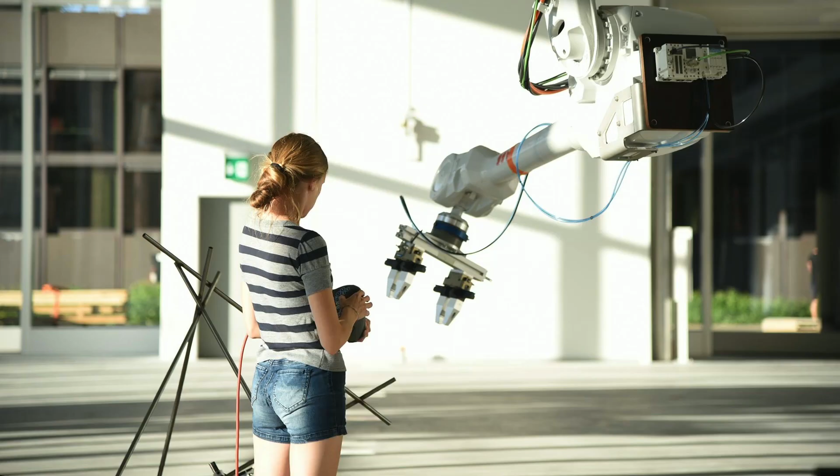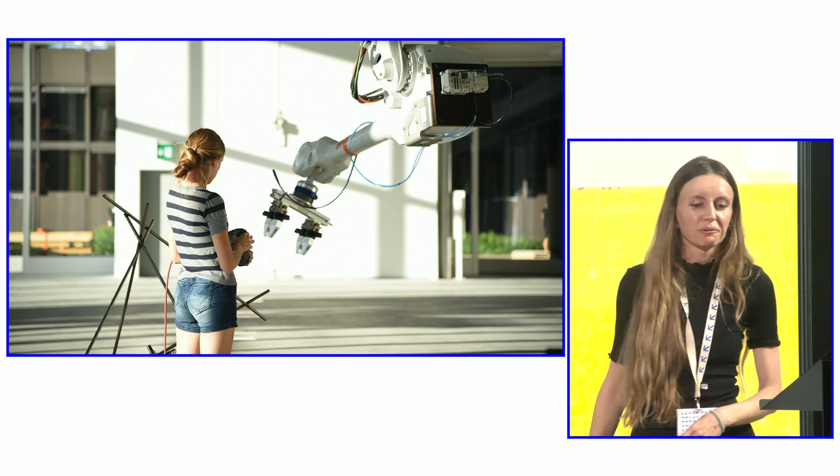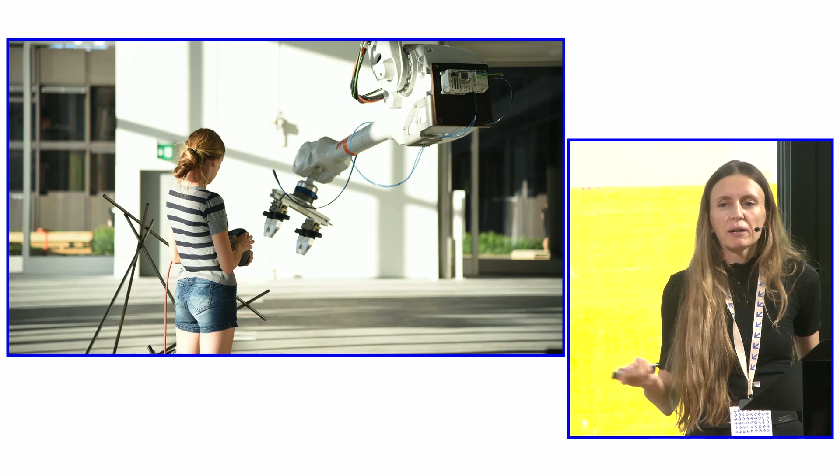And we're a lab of people with different backgrounds, architects, engineers. We really work from different perspectives, and I think that is what makes this type of work possible. So what do we actually do? I wouldn't be here if we didn't work on digital tools, more specifically robots. But we're really interested in rethinking the way that we work with the robots. So the "with" here is on purpose. We want to address issues of application, of acceptance of robotic technology, and of accessibility through our work.

So I'll go into robotic construction. We've seen a lot of talk about our current issues. Talk about any environmental or social issues that you can come up with. Construction is probably really far up there, making them worse. If you find one where construction isn't in there, I'd be really excited to hear about it. But we know we're in a real time of crisis.

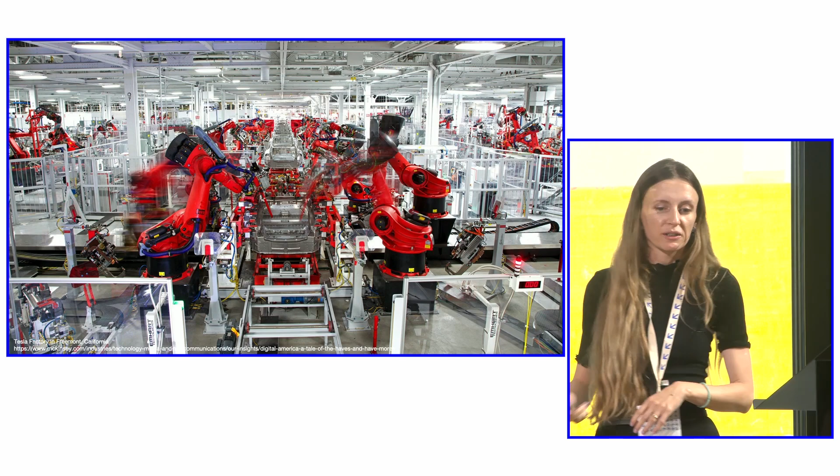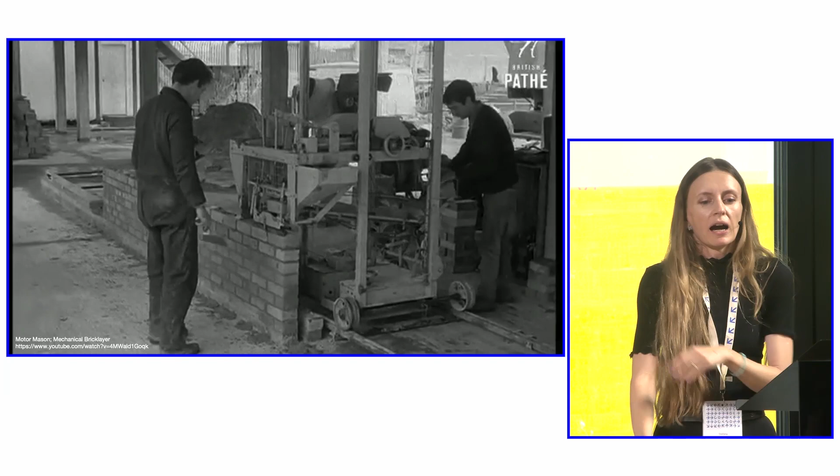And robots and automation had this long-time promise that they're going to bring the solutions for at least a bunch of these problems, either through increasing the efficiency of how we use materials or through decreasing the human involvement in manufacturing, making processes safer, et cetera. We've seen this in construction, from robots automating bricklaying processes ever since the 60s, up until today, where we are witnessing a race for the fastest automated construction in building right now. So it's a nice vision. We've seen some great potentials of robotic technology that's coming up.

But I would point out that there are still quite a bunch of issues that construction is facing. I don't know if this promised automation of construction is really here. If we're thinking about starting from the 60s, it's been over 50 years that this has been a promise, so we're kind of eagerly awaiting it, not to say it's not going to happen. I'm excited to see it happen. But also to be aware of the problems, like why has it been so slow? And also, is this really the right goal to aim for?

So there are problems about the scale, about the messiness of the environments. There are definitely questions about where the humans are in that loop. And there are big questions around adoption and accessibility. The technology is still not easy to access. It's expensive. It requires a very high level of skill. And the workers, the people that work directly with it, are not very eager to take it on. And maybe one slightly underrated issue is the way that this affects design workflows.

So from an architect's perspective, as myself, these automation processes turn the design process into a very streamlined process, very cut off. You need to design. You need to make it designed for the machine in particular. You need to have it ready to work. Then the design's over. We need to implement it. We need to make it robust to make sure nothing goes wrong, and then you execute it. So you lose a little bit this trial and error, this freedom of adaptability, and being able to react to changes, react to what's going on and what you see there.

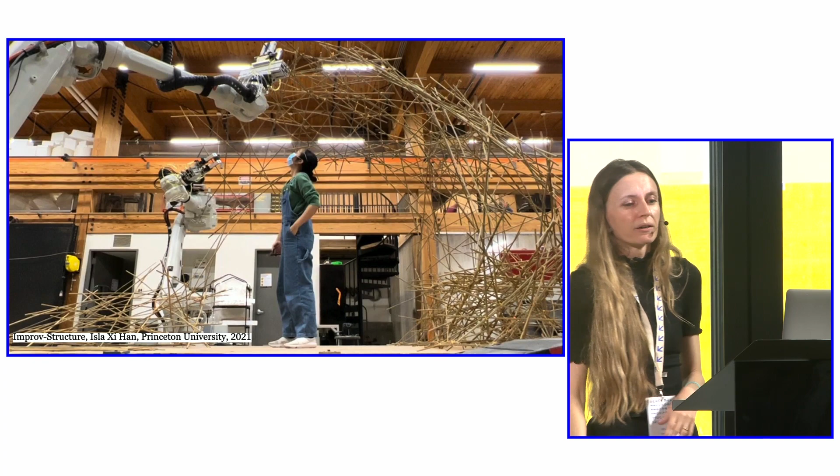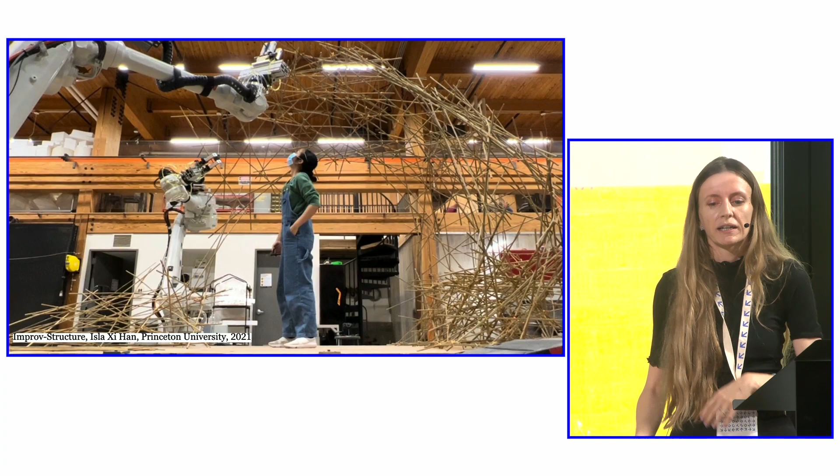So what I'm trying to do with my work is really to look for other means of working with the machines, shift away from automation, actually, towards collaboration. And to move towards these more open processes of design that invite change, invite interaction, and maybe most importantly, invite reflection over what we do. So we do this by focusing on multi-agent processes. I did not start with humans and robots from day one. I actually worked a lot on multi-robotic processes.

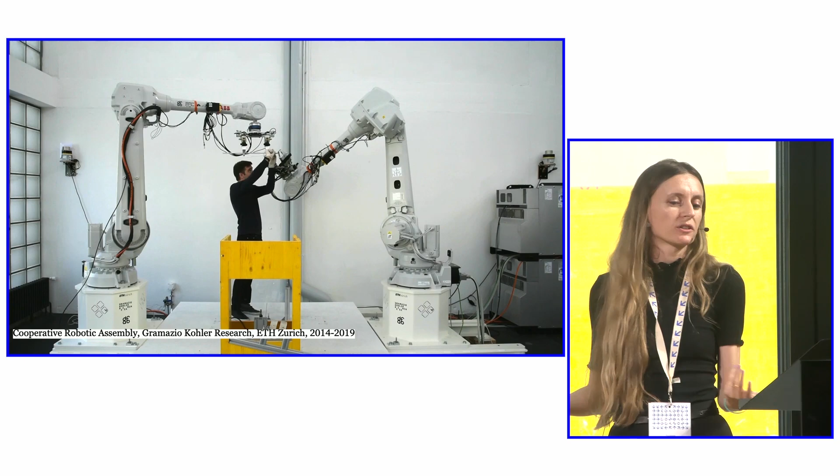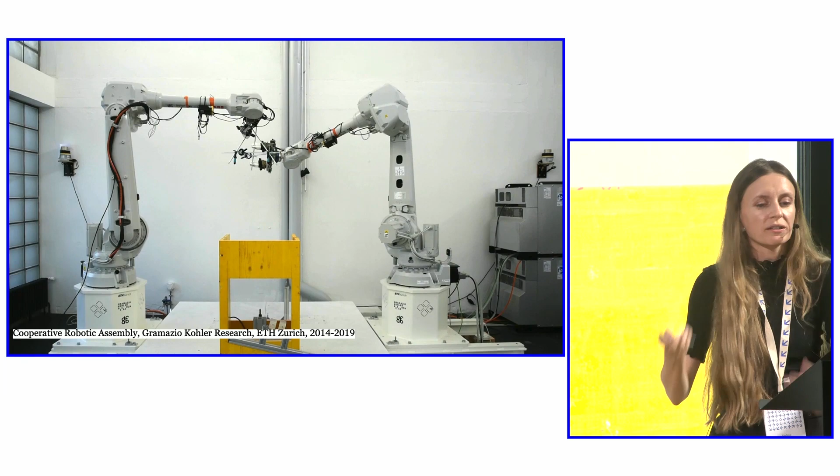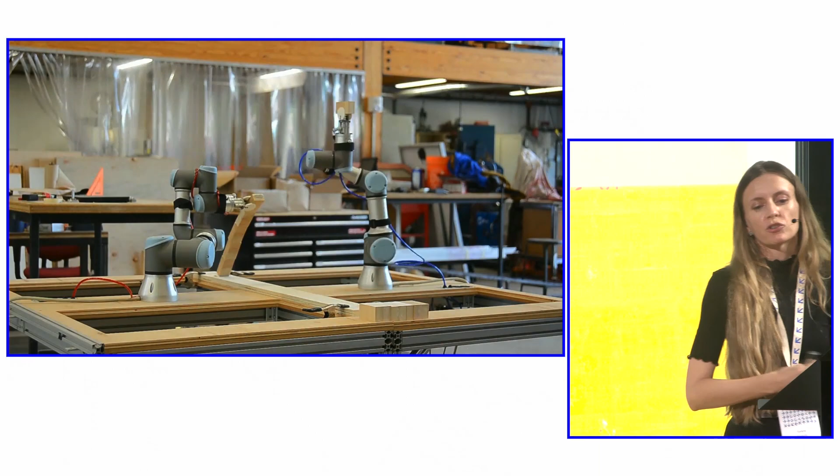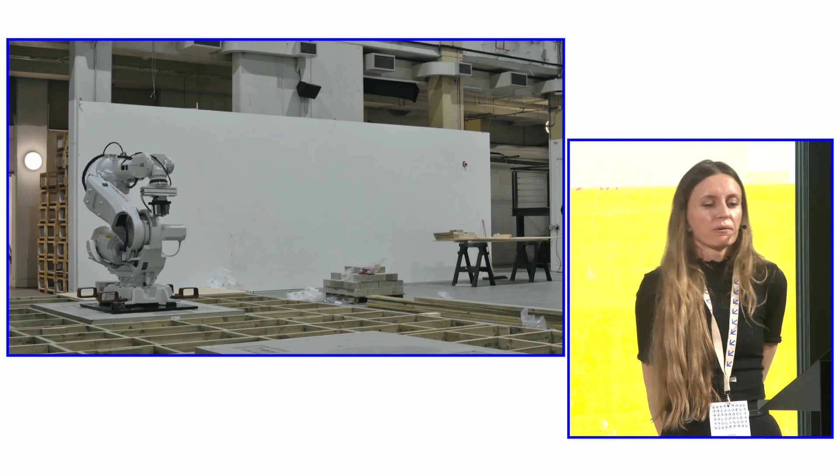But thinking similarly, can we make the processes more agile by allowing machines to change tasks, to take on different roles, and to help each other, to support each other? So a robot here can act as a support, or it can act as a placing agent, and they can take turns to adjust their role in the construction processes. We've adapted this method to apply to different material systems. So we moved from very lightweight structures, which are maybe not the biggest proof that the system really works for structurally performant things, towards heavyweight construction with bricks. We built a vault in London in 2020 with the same principle where the robots can alternate.

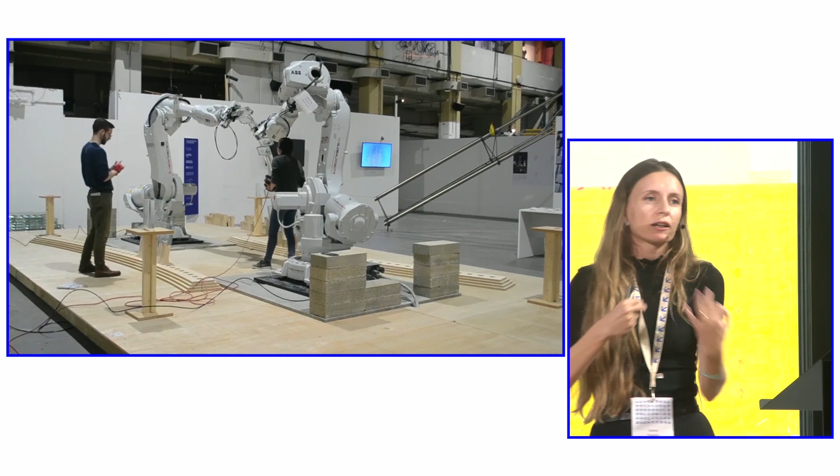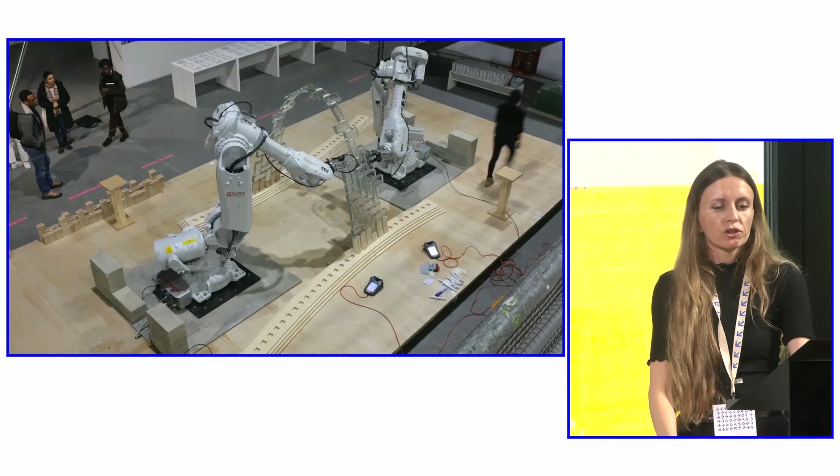They kind of change roles of placement and support, and this way they're able to build this arch collaboratively without requiring any support structure. And they also change their role during the construction process. So they will start with this collaborative action where they built the arch as a basic structure, and then they shift towards placing individual bricks, also towards offering support where it is needed. So there's an interplay of what task and what role do I take on right now.

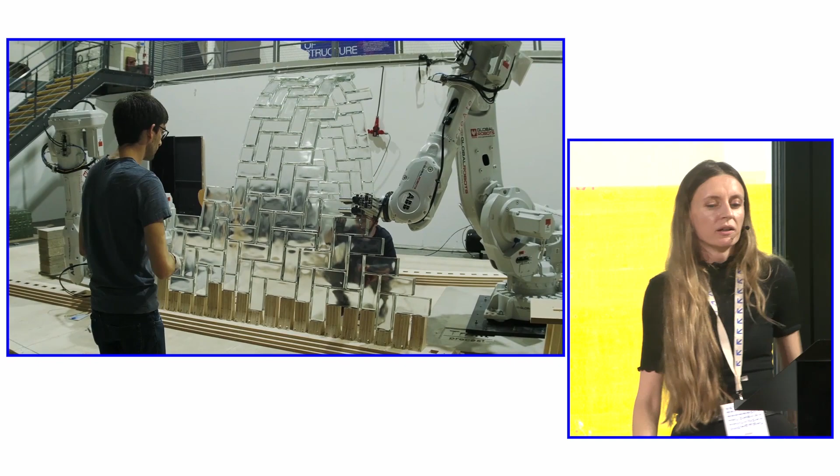There are humans in the process. I'll talk more about this later. The guy you just saw was not just doing some hand massaging, but he was preparing the glue that goes between these bricks. Issues of material, I won't have time to get into those today too much. But at the end of the day, this is a little bit what the process looked like.

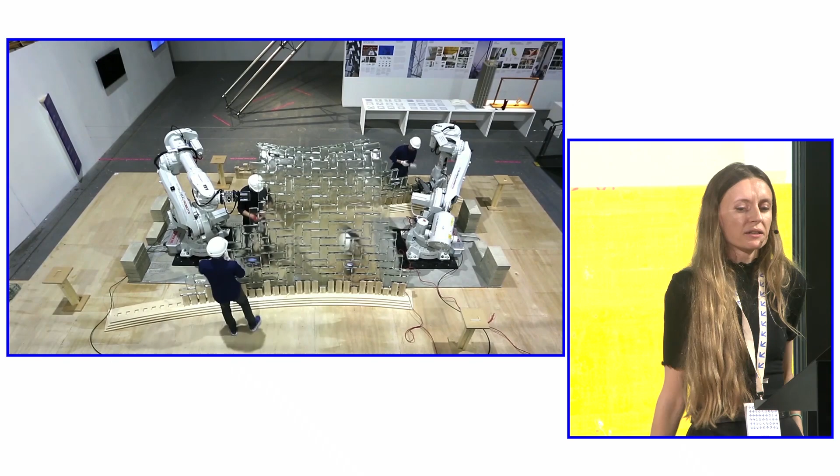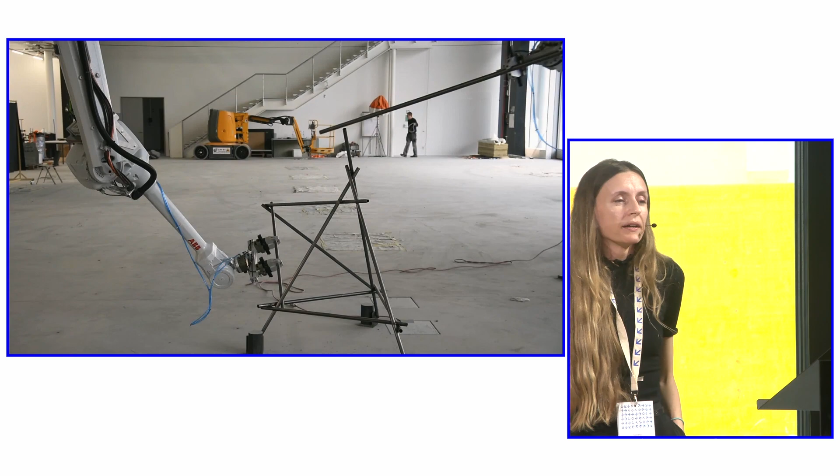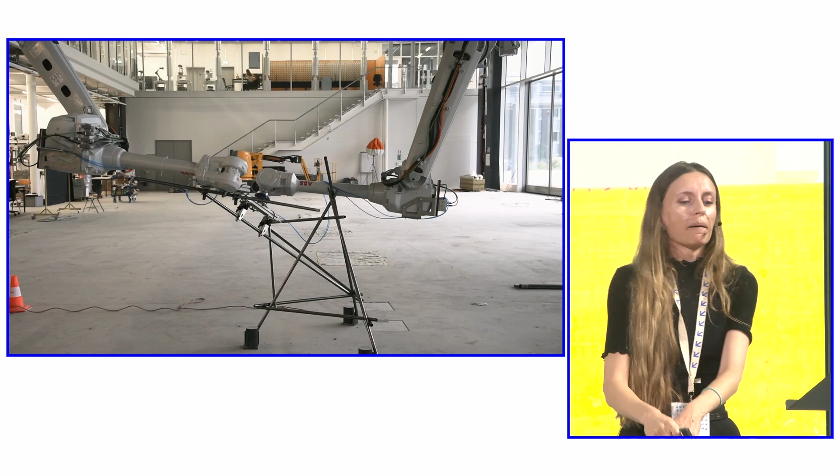So yeah, this is nice and cool and shiny, but where are the humans in the process? You've seen them running around doing stuff. So in both these projects, and in a vast majority of robotic construction projects, we have a classical division of roles. So the robot is usually used for the task that requires precision. For example, the precise 3D placement of elements that is tricky for humans to control and to get into place perfectly.

And then the human is tasked with the maybe more dexterous task. I don't know if the most exciting task or the most efficient task. I'm sure you can do welding more efficiently than I did when I tried to weld these things together. But there's a reason for this, because it's a bit easier for a human to perform these tasks. Even if it's doable with robots, we have robots that weld. It's just an implementation pain, and you just do it by hand quicker.

But on the other hand, you can make up for these tolerances and imprecisions and changes in material that are always there in construction. So it's a pretty quick fix and hack to deal with these things. But at the same time, I think there's more potential in working with robots and humans besides this task division. So we're aware that humans need to be in construction, but I think there's a possibility to give them other tasks, to allow them to interact with the machine more, and to lead to more flexible design processes which allow both humans and robots to enter the decision-making process.

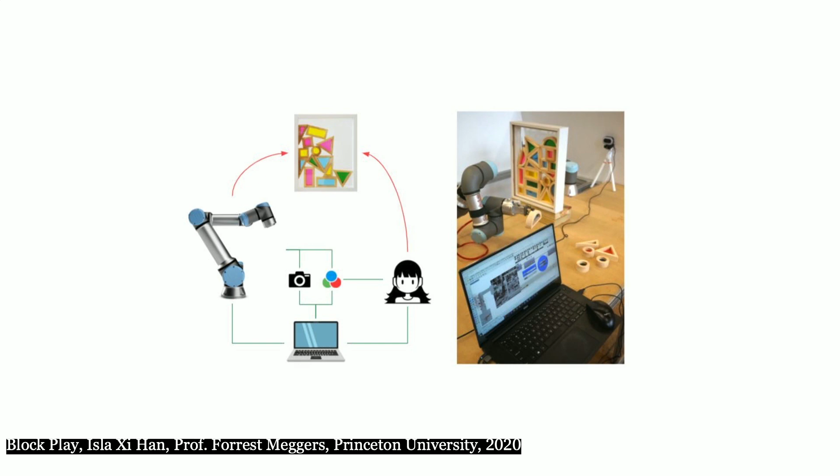So a lot of what I'll show now are really recent projects. There are explorations that we're starting right now. And we started with a rather playful investigation in human-robot collaboration. So this was during my time back at Princeton, where instead of having the robots and humans perform separate tasks, we asked them to perform the same one, but with different capabilities. So it's a project by Isla Han. She's currently a PhD student in Princeton under my supervision.

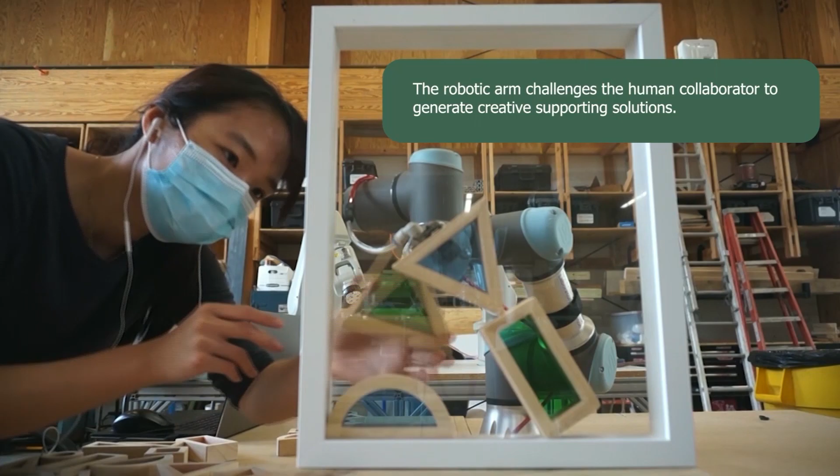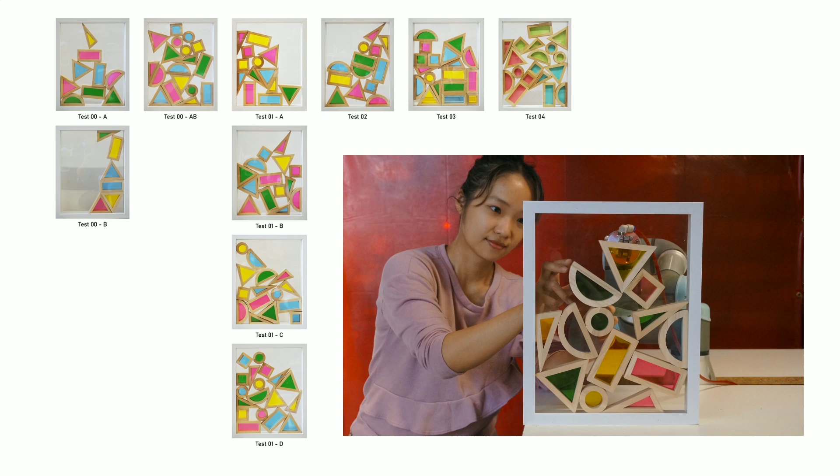Both the robot and the human, in this case, are tasked to place an object. And through the precision of the robot, we can control the constraints that are given to the human in how they address and solve this task of building a structure in equilibrium. And what Isla was really interested in in these processes was, is there creative potential? So can we use the robot to enhance creativity rather than to solve this problem really quickly and efficiently?

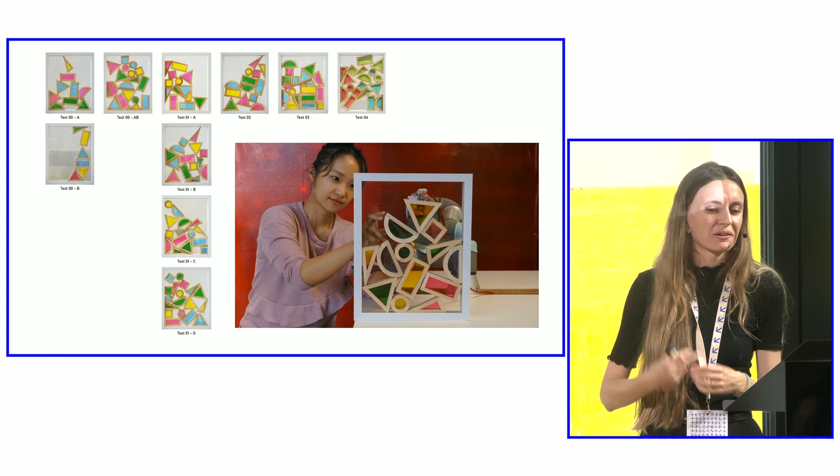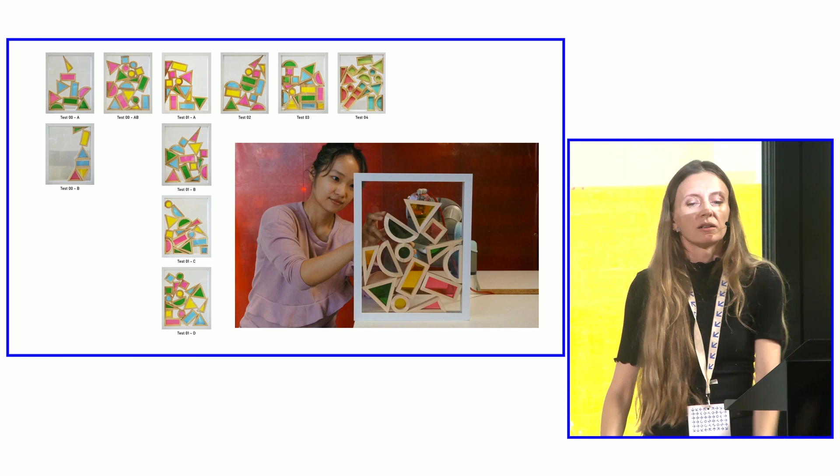And she did a bunch of studies. She changed some parameters. Of course, the robot and the human had different advantages or disadvantages in the process. But her excitement really came from being able to build these seemingly irregular structures that were in balance, that neither she alone would have built, nor the robot if you asked it to do an optimal structure.

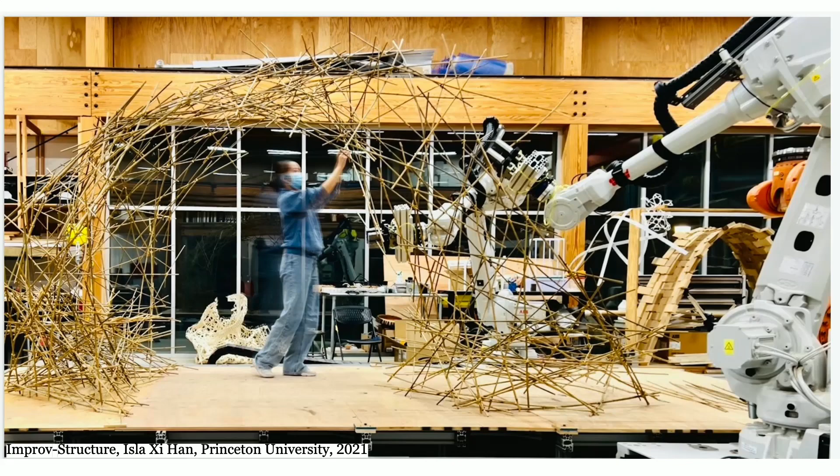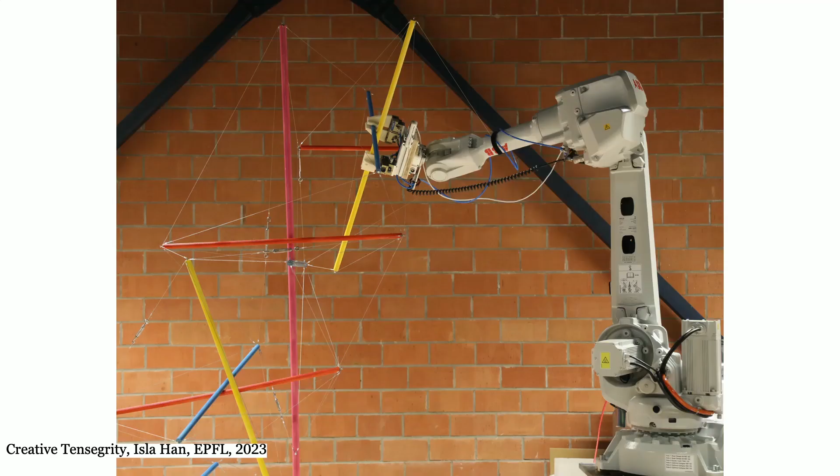And she's expanded these collaborative processes to full-scale structures in different materials. So she built this bamboo structure with no pre-planned structure whatsoever, no geometry where she started from, but really changing roles step by step with the robot, scanning in the structure and taking decisions on the spot. And recently, she set up a tensegrity structure in which both the human and the robot movements are only defined by the current state of the structure. So again, no predefined blueprint whatsoever.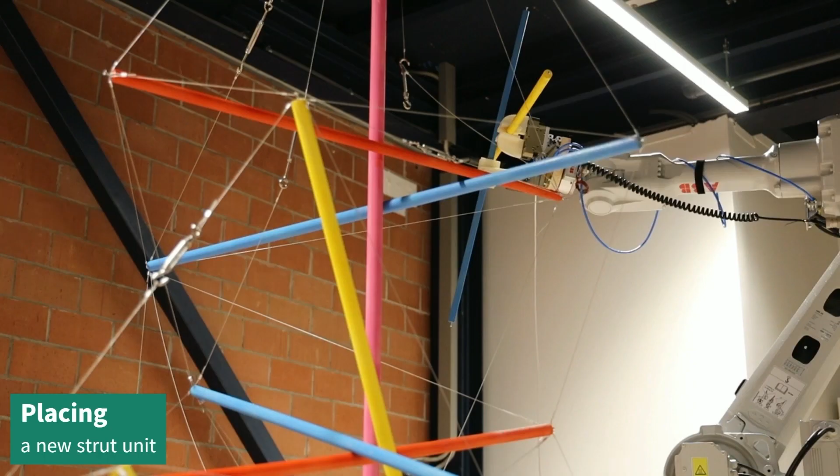In this case, you have the robot positioning an element based on where the previously positioned element is, using a camera setup to localize itself quickly. And a human gets tasked with adding some of the elements themselves, which lead to the final position of the module. And that way, you can just build up one by one to complete the structure. At the same time, we also asked ourselves, why don't we add more?

So why don't we just look at adding more human decision power in the process, but also what happens if we give the robot more decision power or the computer more decision power? So can this down the line lead to more adaptability, to more flexible processes that could be easily adjusted to new environments and constraints?

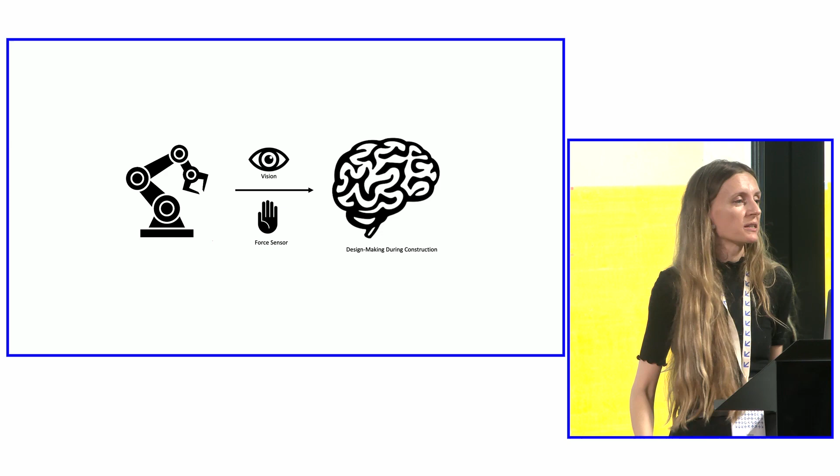So this is a master's work, actually, from a student that I co-advised with Professor Maryam Kamgarpour from EPFL as well, where he used reinforcement learning to decide sequentially at every step where to place a new element to bridge the structure from a starting point to an endpoint. Again, with zero predefined geometry, pre-planned structure to start with. So it wasn't about finding the best sequence, it wasn't about building the quickest structure, but really give the material to the machine and see what it does.

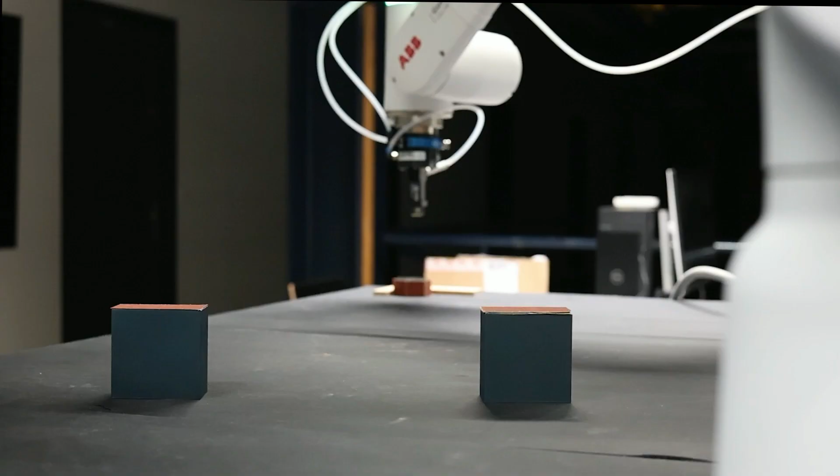It's, of course, we're in 2D, where we're working with an existing, very limited set of geometries. It has a lot of limitations, but we're excited about the possibility to use the data that we have and the capacity of machines and of algorithms to be able to find solutions quickly and without necessarily the human pre-planning that is required in usual processes. We did a quick test to be sure it's kind of standing, and yeah, it was.

You'll just believe me because I'm running out of time.

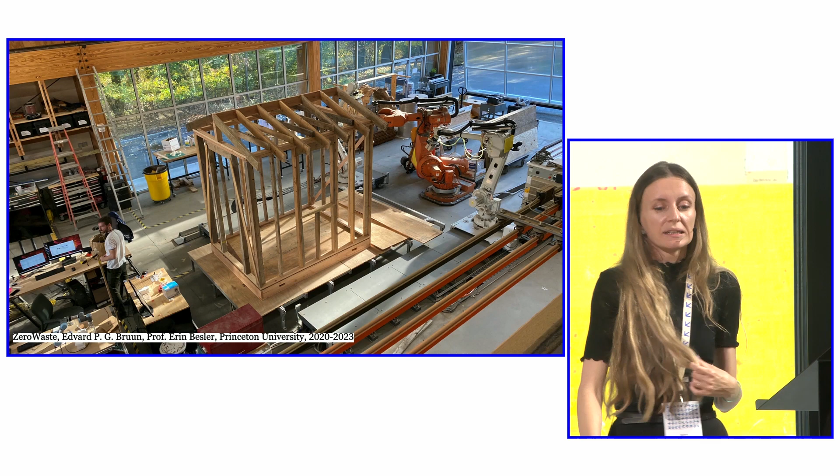So the last point I want to make is it's great to develop all these new methods. It's really, really fun to work with the machines, but at the end of the day, if we don't change the applications that we develop them for, we won't see an impact. So if we keep building nicely shaped new pavilions and structures with cool geometries, that might have a very limited impact on construction. So we have a few projects that aim at a better use of resources, working with existing and available and abundant material.

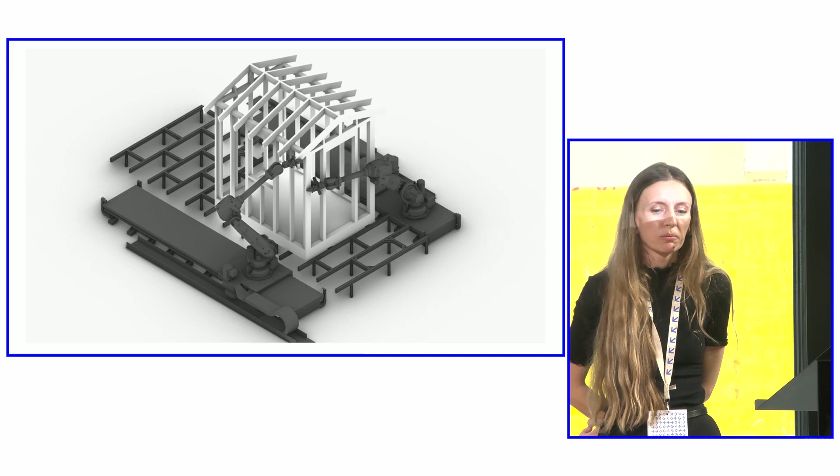Zero Waste is a project I did at Princeton University as well, together with my colleague, Professor Erin Besler, where we asked ourselves if we can use digital technologies for the disassembly and the reconfiguration of structures. So we looked specifically at American wood frame construction and using robots and humans to not disassemble, then inventory the stack of materials, and then reconstruct something, but to do a reconfiguration of the structure in one go without needing these intermediate steps.

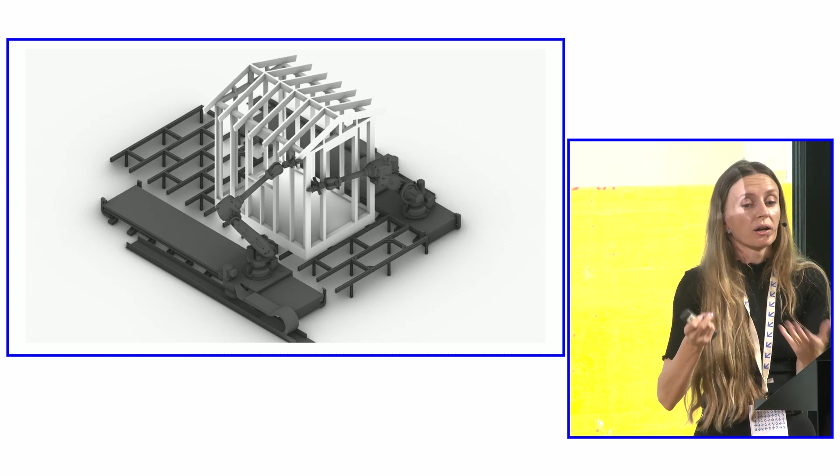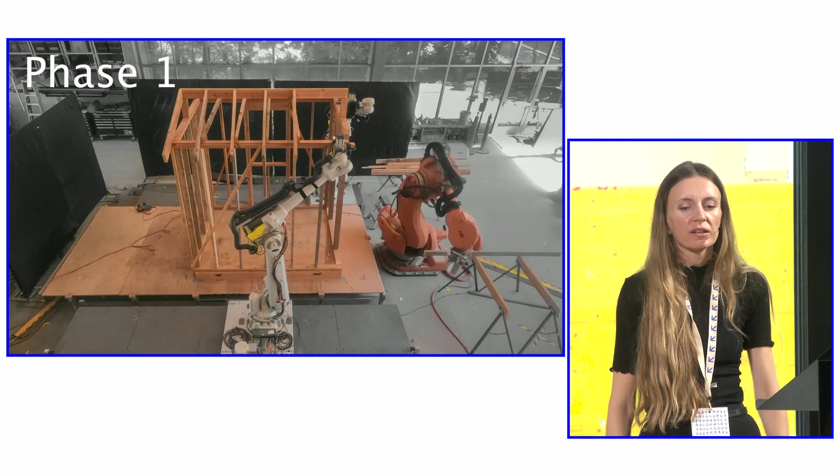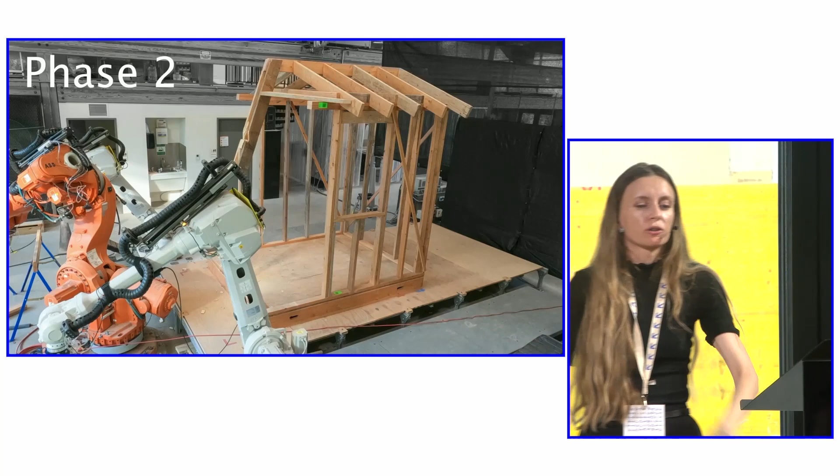And we experimented with different reconfigurations, either addressing local small changes, say at the facade level, but like on a planar level without changing the large geometry, or doing more major geometrical changes in the entire structure, geometry, and structure as it comes with.

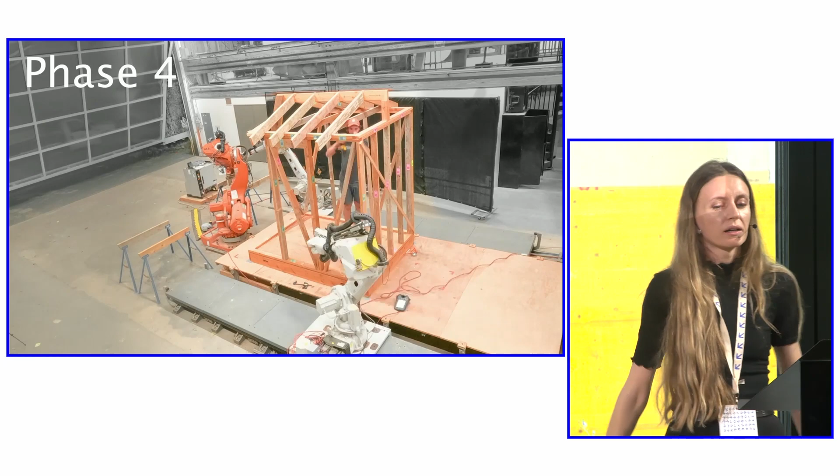This was the first initial test to see what we are able to do, and you see the humans in there. We're going back a little bit to the task division, but in this case, the robots are used as support, they're used as placing agents, but also to just help maneuver an element out of there where the human could point, hey, I want to take this one down, but it's really tricky for us to do.

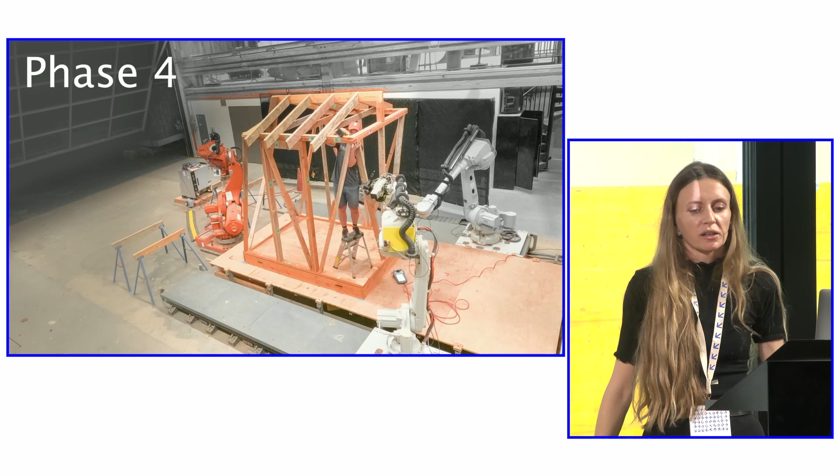And we are currently looking at other materials, especially being in Switzerland. You've seen this project shown by Corentin this morning, so it's a collaboration with the SXL lab at EPFL, where we're looking into the question of, can digital tools be leveraged for reclaiming concrete, and what does this look like? And for me, a central question here is, what is the role of the robot in this process?

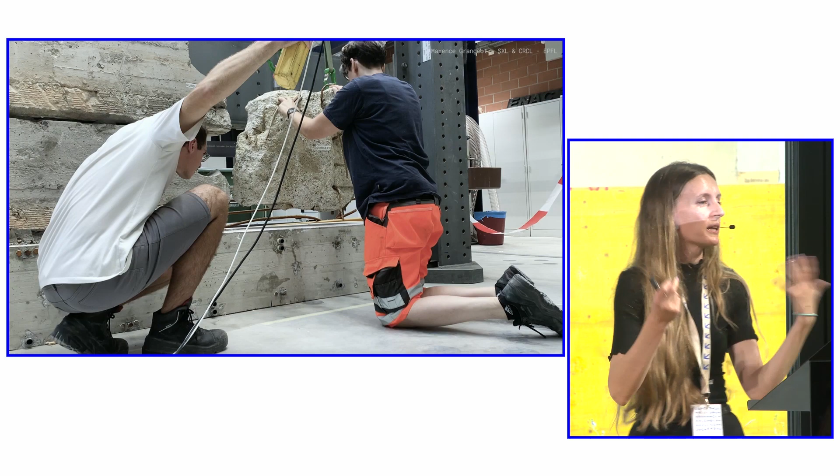We're going beyond the payload of a classical industrial robot that we typically work with. They are large, bulky, they're not very mobile. So it's really starting to be a question of, are we using the right tools, or should robots now rather be large-scale lifting equipment that we can augment with sensors and other information, and what does human-robot collaboration look like at this scale and at this level of precision? In particular, can we use the human intuition and capacity to quickly adapt, to identify elements, and to adjust things, specifically for working with reclaimed materials that come with this huge uncertainty.

This timer is getting to me, so I'll just quickly conclude.

What are we using human-robot collaboration for? Of course, the classical use, efficiency, streamlining.

I'm wondering what happens when it runs out. Sorry.

So there's always an argument for efficiency and streamlining. That is what I am personally less interested in. I'm particularly interested in the creativity, expanding the design process that we do, enabling new applications that we've seen and we're hoping to push forward, and through this, making the connection between the human and the machine to increase access and acceptance, to end up with a nice, happy environment where everyone enjoys working with the machines.